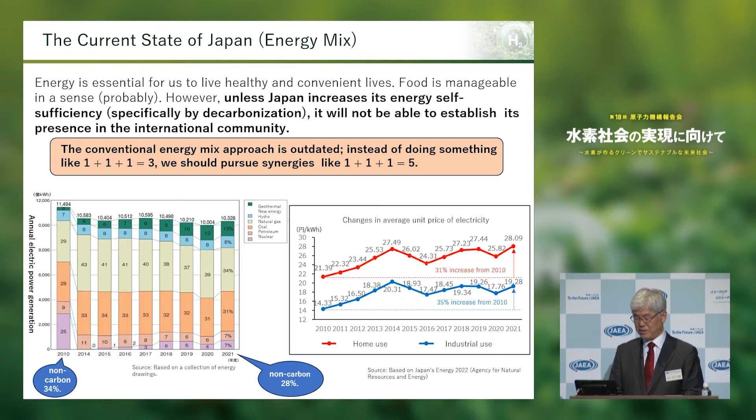As I mentioned earlier, Japan depends on foreign countries for its energy sources, and electricity prices are also going right up. Under such circumstances, the GX policy is being presented by the government. How should we understand this GX policy in the eyes of JAEA?

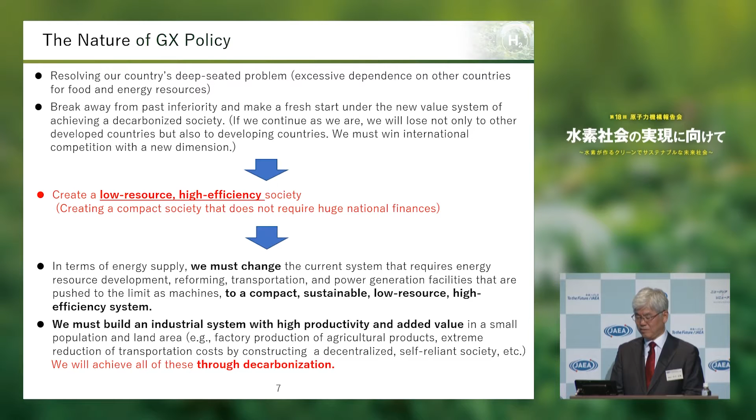Our policy is to create a low-resource but efficient society. Currently, we are rather high-resource dependent and low efficiency, yet we are sanctioned to turn this around. This is the way to clarify and strengthen Japan's position in the world. This is how I understand the GX policy.

Under these circumstances, electricity rates in Japan are becoming higher, as I just showed you in the chart. And why is it so expensive? Generally speaking, it is due to the soaring prices of energy such as oil, gas, and coal. It is said that it is due to international competition and the weaker yen. But is this really true?

On the other hand, I still see another problem, particularly the low utilization rate of power facilities. Renewable energy basically has a low utilization rate subject to natural conditions. On the other hand, coal and gas power generation, used as backup power sources, may have been affected by this problem and is in a state of low utilization.

There are many nuclear plants that have been shut down or whose decommissioning is already decided, and only a few are in operation. Unfortunately, coal-fired thermal power plants have been restricted to a low operation rate due to CO2 emission restrictions. In other words, in total, the low utilization rate of each sector of power generation leads to high energy costs. This is borne by the people and the industry.

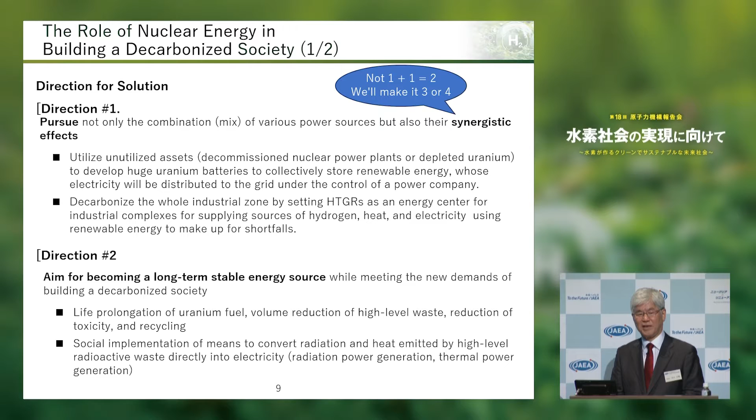The second direction is to aim for securing a long-term stable energy source while meeting the new demands of building a decarbonized society, or convert the radiation or heat that comes out of it directly into energy. Through this kind of research and development, we believe this could be a direction for a solution. Furthermore, we do not yet fully understand the characteristics of nuclear power, so our current focus is on power generation. Can we utilize nuclear energy in various industrial fields such as medicine, materials, agriculture, etc.? Can we achieve this with high efficiency and lower resources?

These major directions can be summarized as follows. First, pursuit of synergistic effects of different energy sources. Second, being sustainable in the sense that it can be used as a long-term, stable energy source. Third, ubiquitous in the sense that it can be used in a variety of fields. This is one of the major targets JAEA should work on going forward.

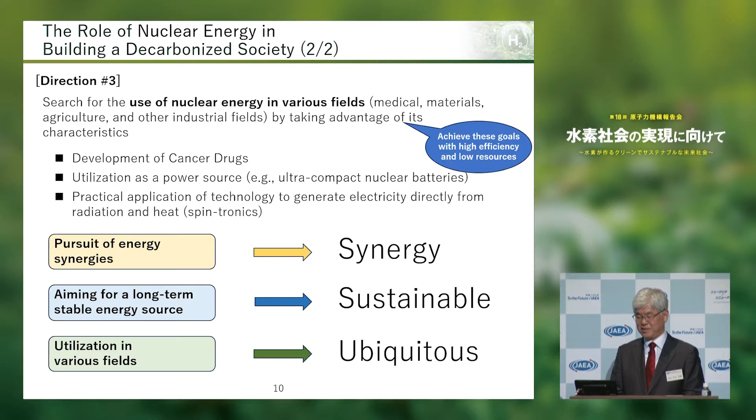Let me further elaborate. For example, regarding synergies, one of the major concerns of the public about nuclear power, on top of the pursuit of safety and efficiency of the nuclear reactor itself, is R&D in making nuclear power more sustainable, aimed at optimizing Japan's energy generation and coordinating with renewable energy. Research and development that reassure the public by solving back-end problems and demonstrating the safety of nuclear power in general.

Ubiquitous diversification of nuclear energy refers to research and development aimed at maximizing the potential of nuclear energy and promoting its application in a variety of fields. This is the schematic of what I have described. Synergy, sustainability, and ubiquity are well combined, and we would like to work on research and development in these areas.

For example, the development of high-temperature gas-cooled reactors, which we are presenting to you today, involves both synergy and ubiquity. This is a combination of using HTGR to successfully combine hydrogen with renewable energy to improve efficiency, and to utilize the various effects produced by HTGR in other areas as well.

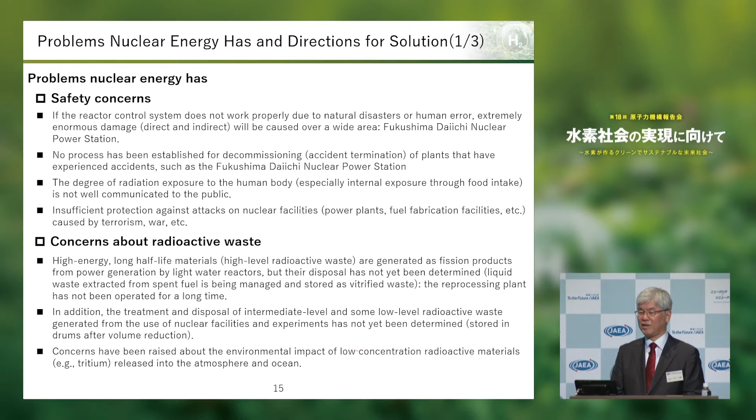Under these circumstances, JAEA would like to promote research and development in a direction that solves these problems. As for the safety of nuclear facilities, we will promote research and development on new reactors with high safety features, and improve accident resistance of existing facilities.

Accumulating this knowledge and working towards safe and efficient decommissioning, in particular identifying decommissioning pathways of the Fukushima Daiichi accident plant, is a major issue. To this end, we are actively working mainly in the Fukushima division.

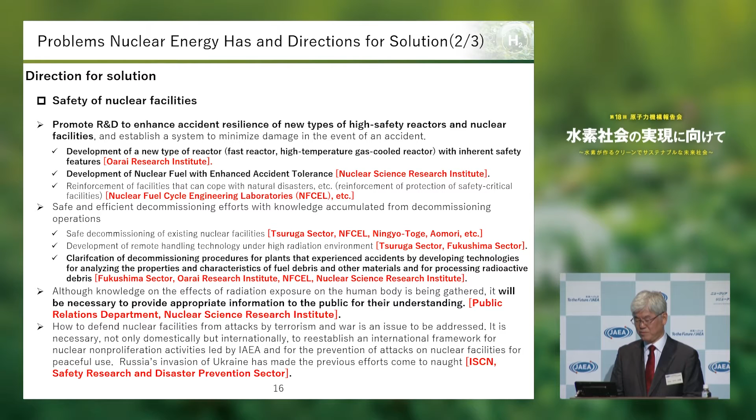We would like to also provide appropriate information on the effects of radiation exposure on the human body. However, with regard to the major issue of terrorist attack and war, although JAEA participates in international nuclear non-proliferation and nuclear security groups, we honestly believe this is a very difficult area for JAEA to deal with.

Then there is a question of what to do with radioactive waste. This is known as nuclear waste, but we'd like to promote this kind of research to see if we can somehow turn it into nuclear resources.

This involves extracting rare metals from this waste and recycling and utilizing them later, or using neutrons to change it into a substance with a shorter half-life. This is the kind of research we are conducting.

Through this kind of research and development, we will deepen public understanding of nuclear energy, reduce social and technological risks, so that nuclear energy can be used as a predominantly stable energy resource in our country. We'd like to promote research and development in this direction.

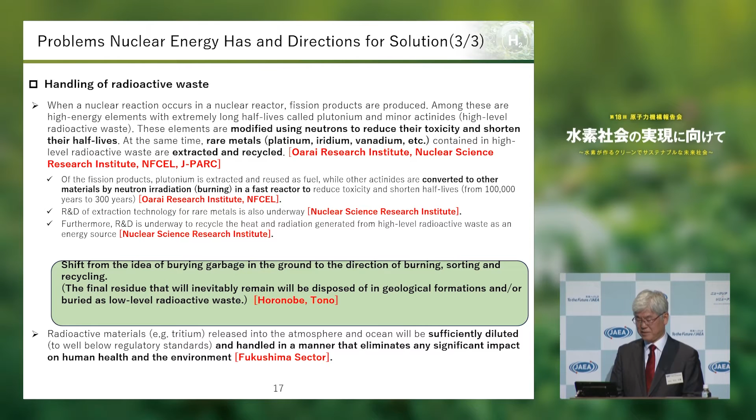In summary, Professor Claudia Goldin of Harvard University, the laureate of this year's Nobel Prize in Economics, said something interesting.

I read her book over 20 years ago. She examined technologies such as the radio, the automobile, and the computer that revolutionized society, and her analysis says that all of them took more than 70 years from their first invention to their practical application and broad penetration.

And in such a process, there are always negative aspects as well as positive aspects. They all solved the problem and advanced to higher penetration.

The spread of automobiles, for example, is naturally convenient, but as it becomes more widespread, there are problems of exhaust gas and traffic accidents. By solving these technical problems, and also by solving the problem of carbon dioxide emissions through the use of electric vehicles and a variety of technologies, all of these are very important for the wide use of vehicles.

The same applies to nuclear power. There are many ways to define what makes nuclear power practical. If the atomic bomb, which is very unfortunate, is considered put into practical use, it was about 70 years since then.

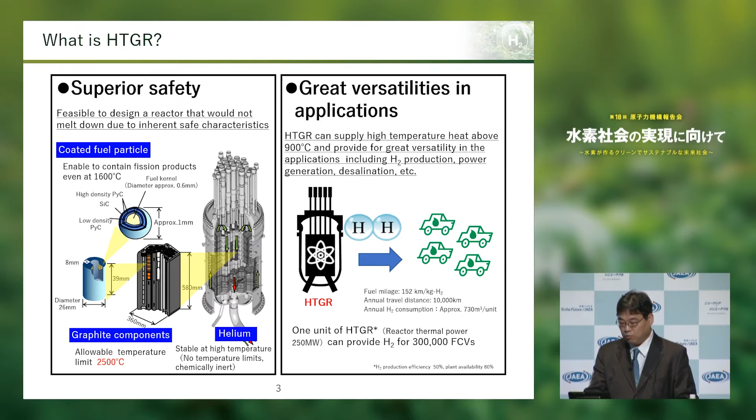We will discuss these two advantages in more detail. The first is superior safety, derived from three key factors. First is ceramic-coated fuel: we use fuel particles coated multiple times by ceramics. These fuel particles start to break down only when the temperature exceeds 2,000 degrees Celsius, so in any case the fuel will not break down unless the temperature exceeds 2,000 degrees Celsius.

Next is graphite structural materials. Graphite has a high heat capacity for HTGRs, which suppresses output density. It is also an excellent heat conductor and thus has excellent heat dissipation performance. Therefore, even if heat is generated in an accident, the reactor has an excellent ability to store a certain amount of heat.

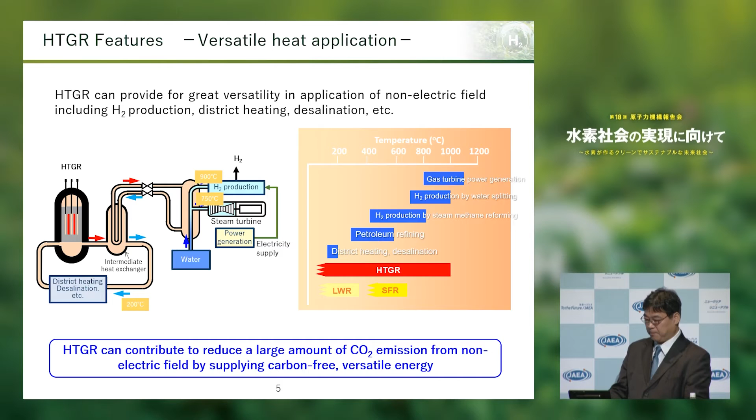In Japan, we have the HTTR in Oarai-machi, Ibaraki Prefecture, which is used for testing and research. This HTTR is our country's first HTGR and is currently owned only by China and Japan in the world. China adopted the pebble bed module. Japan is the only country using the pin-in-block type reactor. Nuclear reactor thermal output is 30,000 kilowatts and helium gas is used as coolant. The core structural material is graphite.

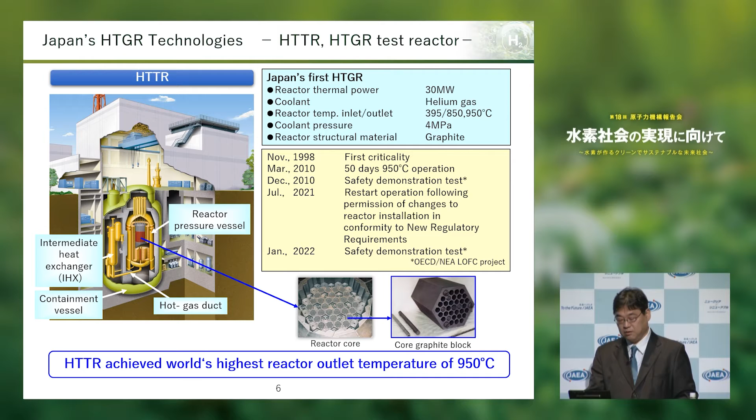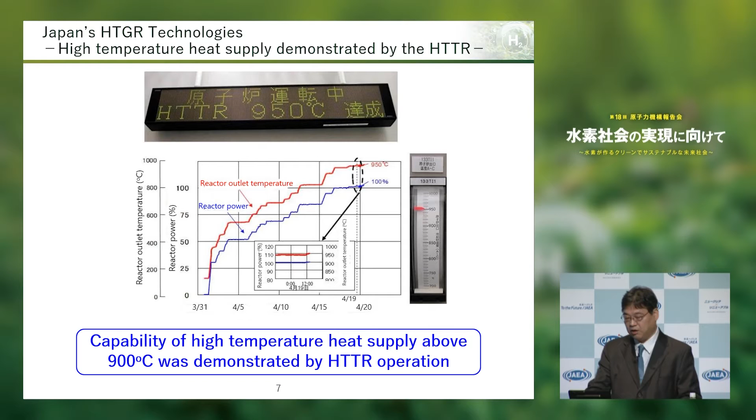Thus, HTGR itself can be built using Japan's technologies alone. HTTR was designed and built by all major Japanese heavy industries, including Toshiba, IHI, Hitachi, Fuji Electric, and Kawasaki Heavy Industries, with Mitsubishi Heavy Industries as the lead manager.

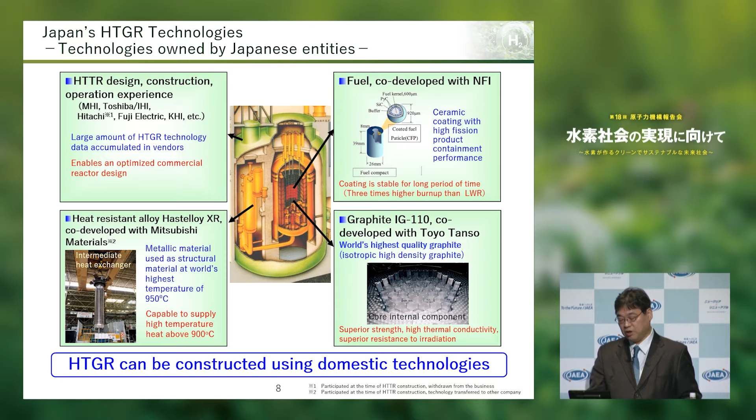As for the high-temperature materials, Hastelloy XR was developed jointly by Mitsubishi Materials and JAERI at that time. In the area of fuel, the world's best performing fuel is owned by NFI, Nuclear Fuel Industries. In addition, Toyo Tanso has the capacity to produce nuclear-grade graphite, IG-110, which is a structural material for the reactor core. This graphite made by Toyo Tanso is also used in HTGR in China. In this way, it is possible to construct HTGR demonstration reactors using only domestic technologies alone.

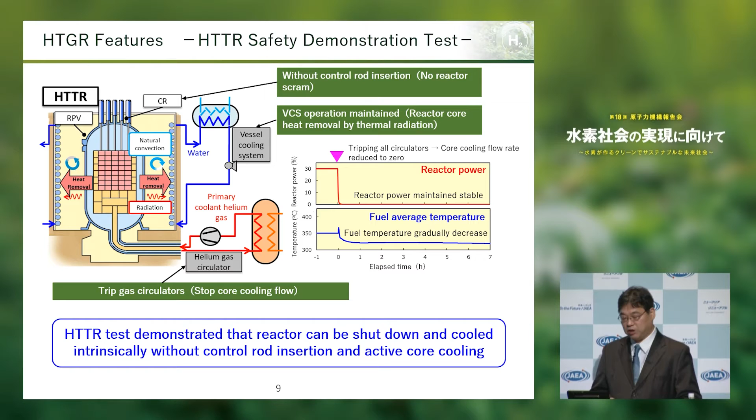This is what is called the inherent safety of HTGR. If you build too large a reactor, these phenomena will not occur. Therefore, in order to take advantage of the safety features of HTGR, reactors have to be small, and the output is inevitably limited. But this is a trade-off—at a certain size, HTGR has its inherent safety characteristics.

As for the issues and measures to be taken for the future social implementation of the HTGR, as explained earlier by our president, we believe the issues can be broadly divided into social, technical, and policy. I will omit the policy part from today's presentation, but I believe it will take time for the regulations to be implemented. The first is society, which requires site selection and development of a business scheme.

Specifically, we are planning to build a business model that can win social acceptance. We are currently planning a project to reach out to stakeholders and, as explained on the next slide, to take advantage of the UK government's project.

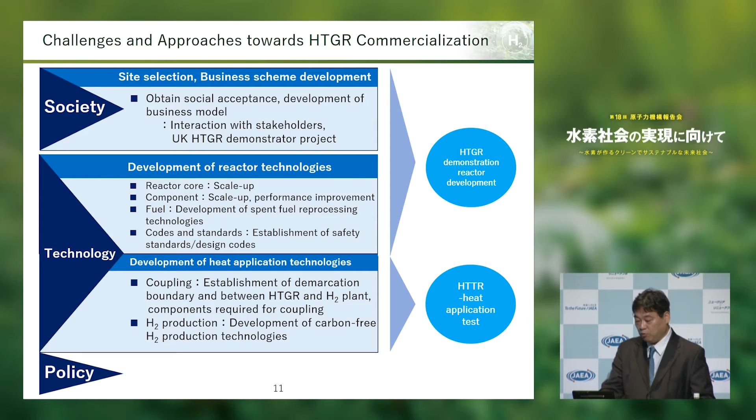This eventually has to be carbon-free technology, and we are currently discussing what is the best technology for this purpose. We need to solve these challenges through the development of domestic demonstration reactors, the HTTR, and heat application tests.

We would like to connect the hydrogen plant and steam reformer first. As a next step, we would like to consider carbon-free methods. That is what we are thinking at this moment.

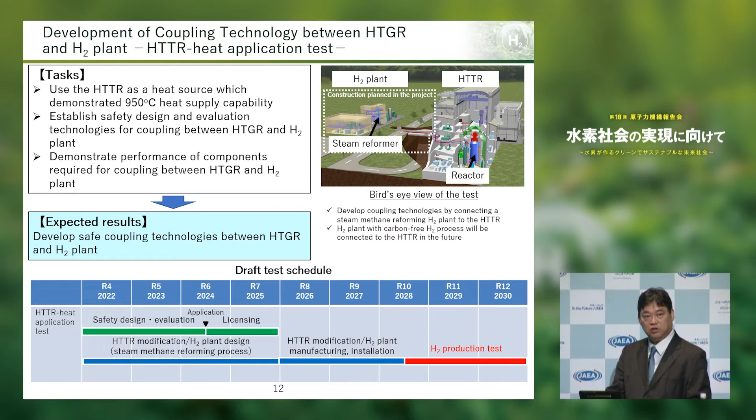By achieving this as soon as possible, we'd like to further establish this technology ahead of the rest of the world, and introduce it in the British project, which I will elaborate on later.

There are several applicable hydrogen production technologies. There are four at the bottom. Further left is methane reforming, which gives off carbon dioxide. The three on the right are green hydrogen, which does not emit carbon dioxide.

The three on the right, from left to right, are: high-temperature steam electrolysis, SOEC, which is partly commercialized; then in the middle, methane pyrolysis, where methane is differentiated and extracted as solid carbon and hydrogen; and the rightmost is the IS method, a thermochemical method to make hydrogen using circulation of iodine, sulfur, water, and oxygen. We are developing these technologies.

We consider these three candidates, and we will assess the maturity level of technology to evaluate what will be most appropriate for the early achievement of HTGR. We are currently conducting a feasibility study.

It is not just about potential; we need to think about social implementation and the earliest commercialization. From this perspective, the current SOEC may have a reasonable advantage.

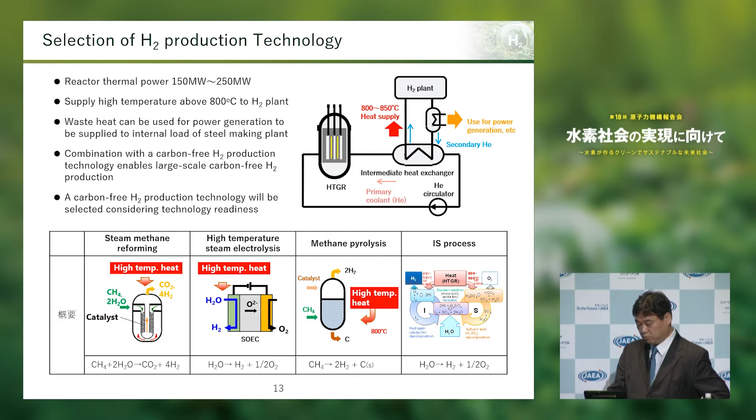Next is the social implementation model of HTGR. In the field of social implementation, we can build, for example, an HTGR in an industrial complex, or an HTGR in an energy supply center, and by flowing helium gas, heat can be used from various aspects and further utilized for hydrogen, electricity, and steam.

We'd like to supply these byproducts to oil refineries, petrochemical plants, chemical plants, and steel mills. Also, hydrogen, electricity, and steam have capacity to adjust power, so we would like to use them for curtailment of renewable energy, as Dr. Kato mentioned earlier in his presentation. For example, HTGR can be used to produce hydrogen during the day and produce electricity at night. Also, it can serve external demand, with hydrogen, electricity, and steam used to meet demand flexibly in the neighborhood.

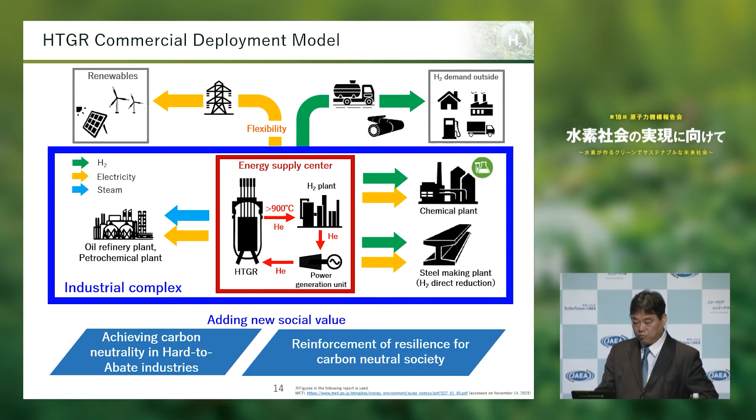However, HTGR's greatest strength is in the utilization of heat. So we are thinking about how we can create and use hydrogen and steam in the industrial complex without losses. In other words, we can provide new social value. I believe that HTGR can be used to achieve carbon neutrality in industry and to strengthen the resilience of carbon-neutral society and its systems.

From here on, I'd like to touch upon the United Kingdom, who is also trying to utilize HTGR from a similar perspective as Japan. The UK decided to specialize in HTGR as the next generation reactor. Power generation will be done by SMR, which in the UK is a light water reactor, but HTGR will be used for the parts that use heat, especially for plants that are difficult to decarbonize. With this in mind, the UK is proceeding with the HTGR demonstration program, comprised of Phase A, B, and C. Phase A is a pre-FEED study which has already been completed. Phase B and Phase C follow, and Phase B is currently underway.

For Phase A, 4 institutions applied. Phase B is now underway with 2 shortlisted institutions. NNL, a British National Research Institute, and JAEA have teamed up to apply for Phase B, which has been adopted. The other institution is an American company. In order to promote this program, especially for decarbonization in the UK, a comprehensive memorandum of understanding on HTGRs was recently signed between NNL of UK and the JAEA President in September.

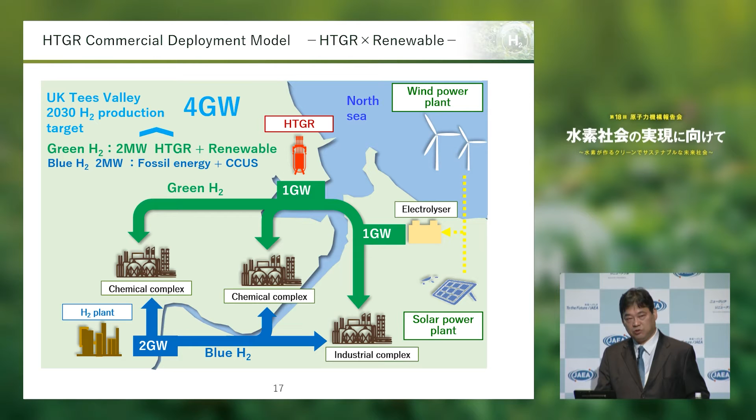So in the future, we will probably build a demonstration reactor here in the UK, using this site as the first candidate. This is the plan that is underway. JAEA is cooperating on this project. The HTGR itself will be built with Japanese technology. The UK operates carbon dioxide cooled reactors, but almost no HTGR. We are in the process of introducing our technology, and we would like to eventually bring such technologies back to Japan.

Furthermore, the residents living near the Hartlepool, Tees Valley site are quite aware of the benefits of nuclear power plants, and I have heard that surveys show 70 to 80% of residents are in favor of nuclear power plants. I believe achieving this location near the place of demand users will be a major step in the future development of HTGR.

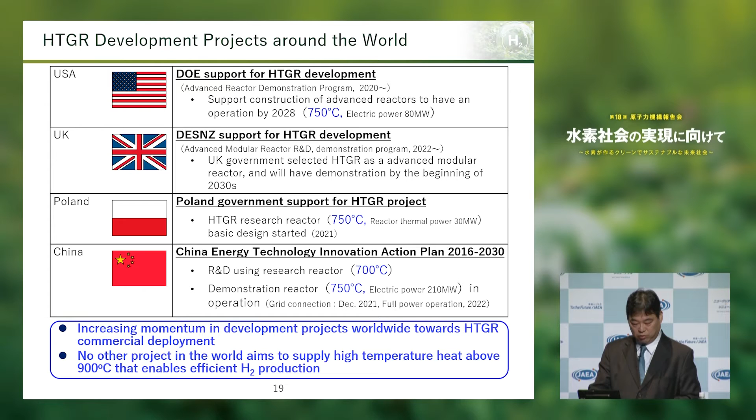In closing, let me summarize. In terms of hydrogen production in Japan, there are several issues. We are looking into the location of HTGR with excellent safety features in close proximity to users' premises in Japan as well. The UK already started the planning, and we are hoping to achieve this in Japan through dialogue with the regulatory side and try to realize it in the demonstration reactor.

Second, this is the development of the demonstration reactor, which also aims to start operation in the second half of the 2030s, while also being able to supply the necessary amount to become carbon neutral by 2050. I would like to work with a great sense of speed, and I'd like to work with industry to achieve our country's goal of zero carbon emissions by 2050 with all of our efforts at JAEA.

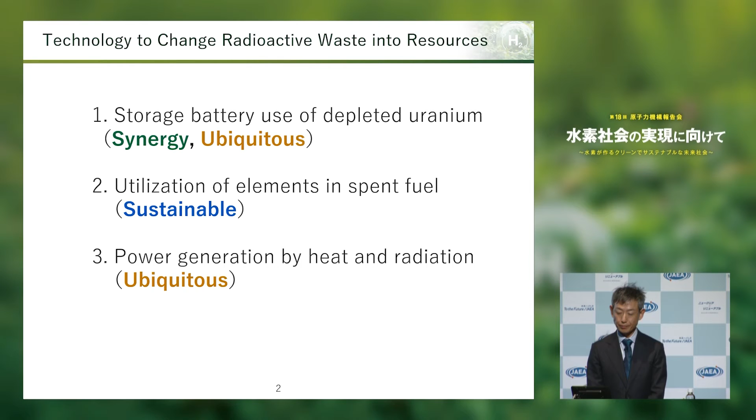Let's talk about the first technology. I would like to share with you this number, 16,000 tons. Will you be able to tell what this number represents? It is the amount of depleted uranium stored in Japan.

As participants here today probably understand very well, new fuels used in nuclear power plants are called enriched uranium. Highly fissile uranium-235 inside natural uranium is collected and enriched to be used for power generation. What remains after uranium-235 is removed, mainly composed of uranium-238, is called depleted uranium.

The depleted uranium is currently stored to be used for fast reactors in the future. As of 2021, around 16,000 tons of depleted uranium is stored.

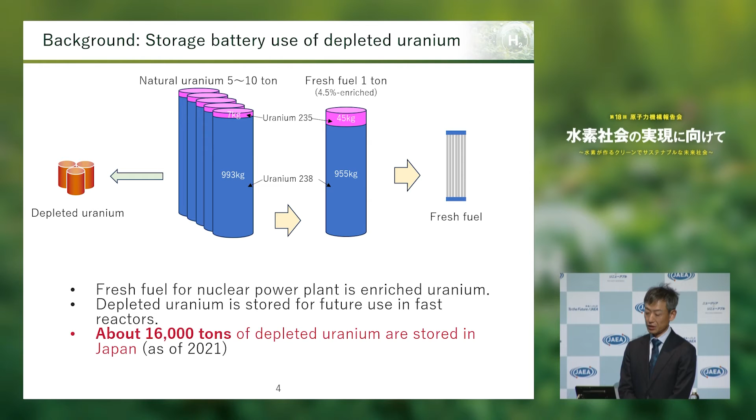Against that backdrop, we are currently working on research and development, thinking of the possibility of using depleted uranium as a storage battery. In other words, we are thinking of storing surplus electricity from nuclear power plants and renewable energy inside this storage battery, making a contribution to peak shift and grid stabilization, and sending the power to the point of consumption.

Furthermore, we are thinking of using this as an emergency power source at nuclear power plants as well. So our idea is to develop a uranium-based redox flow battery to use non-burnable uranium as a resource to store surplus electricity generated by renewable energy and nuclear power plants.

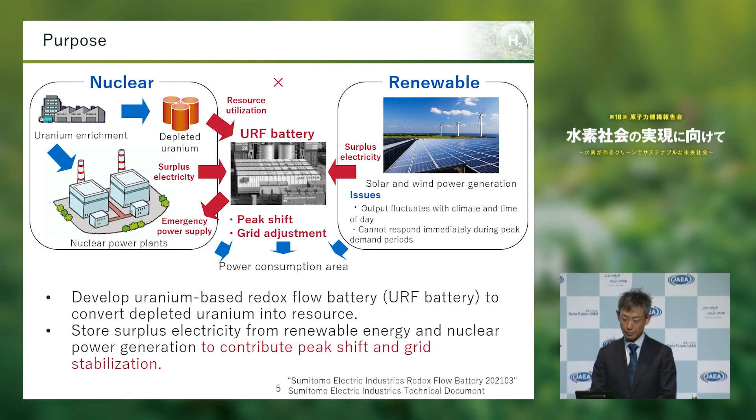Let me explain the uranium redox flow battery. As shown in the diagram, there are two types of tanks, and uranium solution circulates in the tanks. As for the uranium, there are 4 different uranium valences as shown. In this system, that difference is used to charge and discharge at the cell.

What are the features of the uranium redox flow battery? One feature is its large capacity. Basically, in this concept, you can increase the amount of storage by increasing the capacity of the tank.

According to one estimate, 30,000 kilowatt-hours, equivalent to electricity used in one day by 3,000 households, can be stored by using 650 tons of uranium. If we convert 16,000 tons of depleted uranium, in other words all the depleted uranium in Japan, into storage battery, it is estimated that it would be equivalent to 740,000 kilowatt-hours. That is 25 times the number shown here, meaning we can store electricity worth 75,000 households.

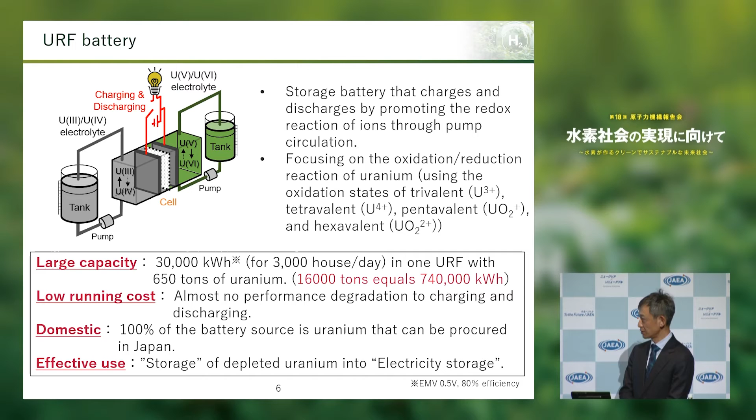Now, I suppose many people wonder why we should use uranium. Here, I listed advantages and disadvantages of using uranium. The redox flow battery itself is a practically used technology, structured of vanadium, though we are fully dependent on import for the vanadium element.

To address this point, we believe depleted uranium can perhaps be used to make a semi-domestic battery. Another point is that it is more efficient than vanadium.

Let me share an example. Electricity loss occurs all the time when we recharge. That loss is around 20% in case of vanadium, but loss is only 3% for uranium according to a report, making it efficient.

On the other hand, one known disadvantage is instability of uranium valence when it is contaminated with water, though it has already been confirmed that it can be stabilized by electrolyte preparation. Furthermore, handling of uranium as nuclear fuel material can be a challenge. I would not say it can be installed in a variety of locations, but, for example, we think it can possibly be used in the way shown on the slide and be installed in nuclear power plant sites.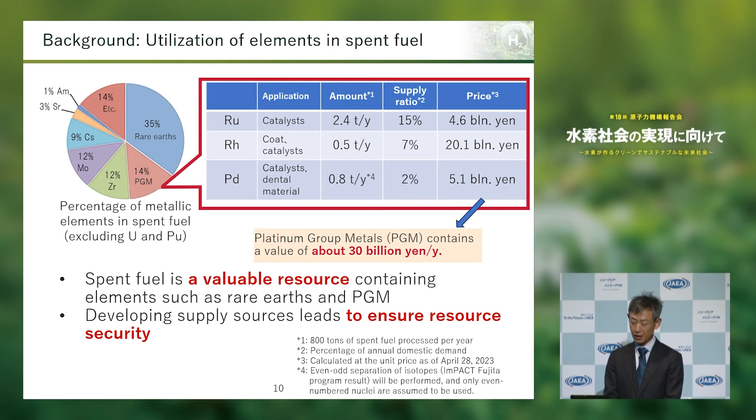Therefore, JAEA has been working on developing element separation technologies. By advancing the technology, utilizing existing facilities, and applying it to spent fuel, high-level liquid waste, and industrial waste known as urban mines, we look forward to developing practical separation and utilization technologies for useful elements.

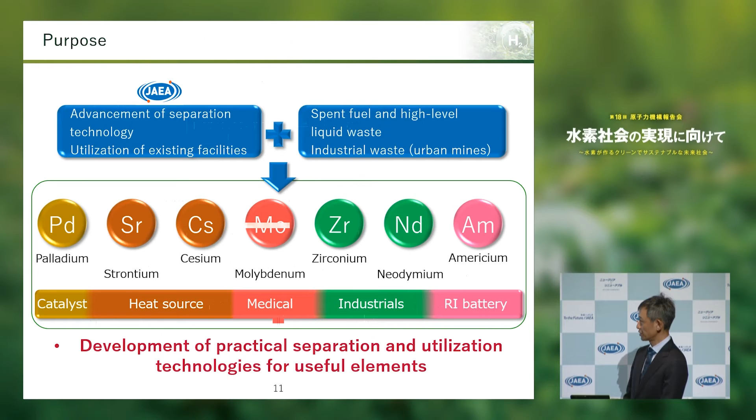Let's look at the actual ways of separation. Allow me to introduce one of the ways called solvent extraction. As for the method, JAEA has already been developing the SELECT process, shown in the slide.

The process has been under development mainly for separating minor actinides called americium and curium. By using that process as a base, we are trying to develop a technology to separate elements such as palladium and rare earth, which I have mentioned. We think this initiative is effective in reducing the volume and hazard level of radioactive waste by combining it with nuclear transmutation.

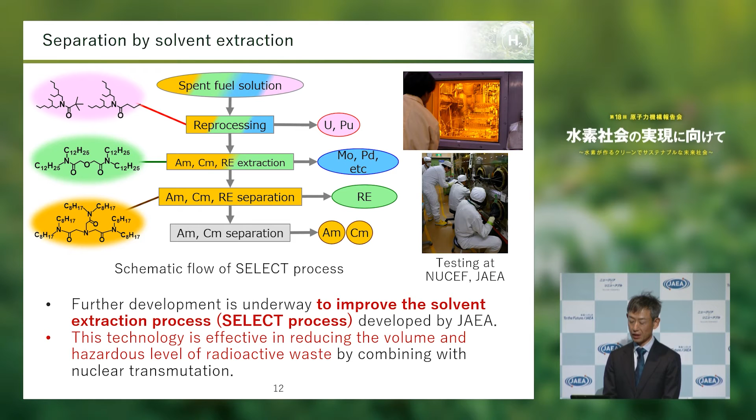Let me introduce you to another method called laser-assisted separation. We want to separate minor actinides called americium and curium from rare earth. But the minor actinide and the rare earth have chemical similarity, which makes it very challenging to separate them.

Though here, for example, by applying laser at absorption wavelength against americium, we can cause laser-induced photochemical reaction with americium. We are currently developing a technology to selectively separate americium only, by letting it either bind or not bind with liquid called extraction solvent. This technology has high element selectivity, so it is expected to simplify the process and reduce secondary waste. A press release was already made on it by JAEA last year.

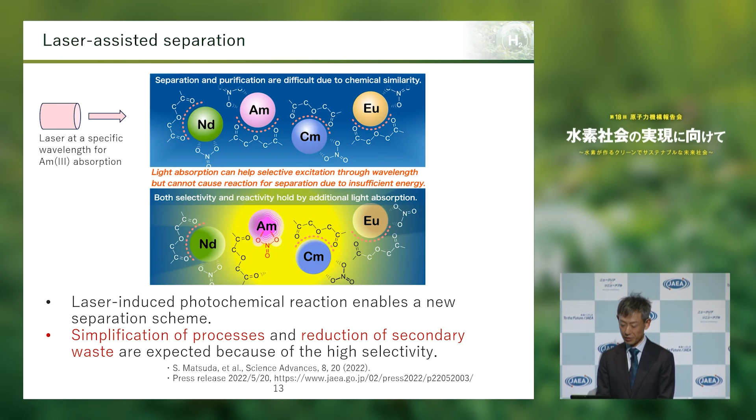Here is the current status and future prospects. Research on separating useful elements from spent fuel has already been conducted, but it is still in the basic research stage and has not yet reached the stage of practical application. In the ImPACT program conducted between 2014 and 2018, similar research was conducted. It was confirmed that 95% of a PGM, palladium, can be recovered by a method called wet electrolysis, though that is also in the basic research stage.

On the other hand, our idea is to realize advancement of the separation process to extract valuable elements from waste solutions, even if only in a small amount. Furthermore, as I mentioned, we are thinking of the possibility to apply such technology not only for radioactive waste but also for urban mines. So by extracting useful elements, we hope to extract several dozen grams of such elements from fuel solution in about 3 years and scale the technology.

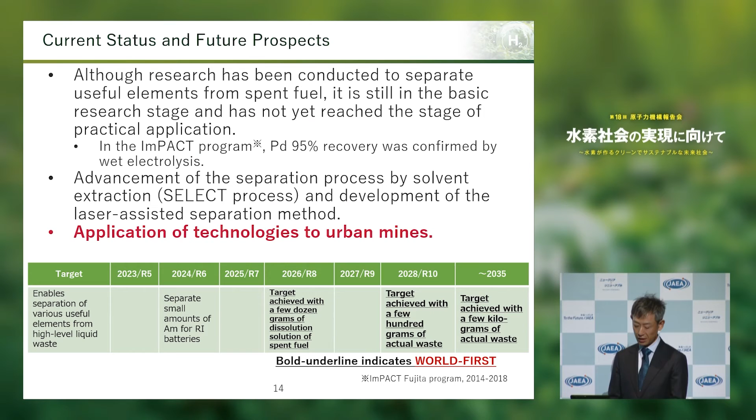So, why is plutonium-238 used? As I said before, elements used to convert heat to electricity are sensitive to radiation. On the other hand, plutonium-238 has high heat generation but low radiation. So this element is often used for space exploration, especially by the US.

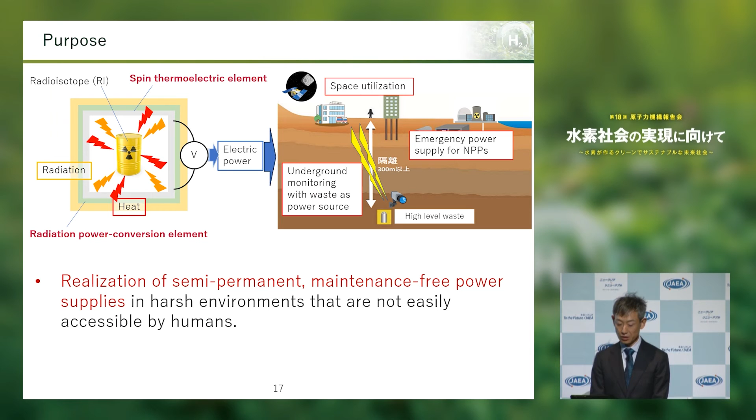As for conversion of heat into electricity, we are paying attention to a technology called spintronics. This is a hybrid technology of electric and magnetics. I am sure everyone knows that electrons circulate around the nucleus, and the charge of the electrons makes them move, which causes current, the main player in electronics.

On the other hand, the electrons are rotating as well, which is called spin current. The spin current is the origin of the magnetic current. Spintronics is a technology that tries to control and utilize the spin current.

We are thinking of using spintronics to convert heat to electricity. Existing thermoelectric element systems and spin thermoelectric elements are compared on this page.

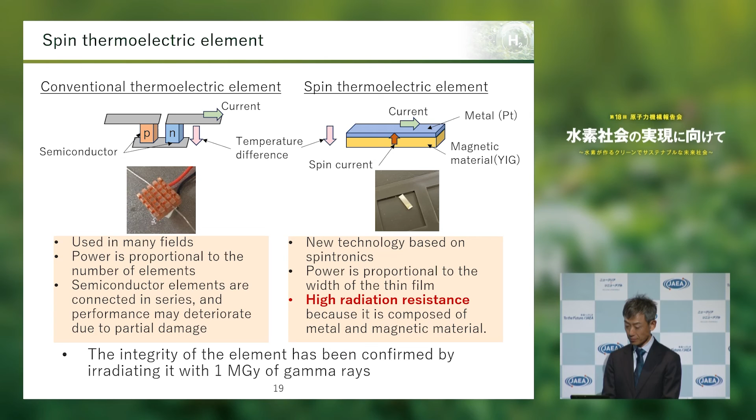We have already demonstrated its principle by applying Harima's SPring-8 synchrotron X-rays to an element made of Ni and SiC. The synchrotron X-ray is used as an alternative to gamma ray.

Let's look at current status and future prospects. Proof of principle for both spin thermoelectricity and radiation power generation that I talked about are confirmed, though the issue is their low power generation efficiency. So it is required to improve power generation efficiency and to conduct demonstration tests using radioactive waste.

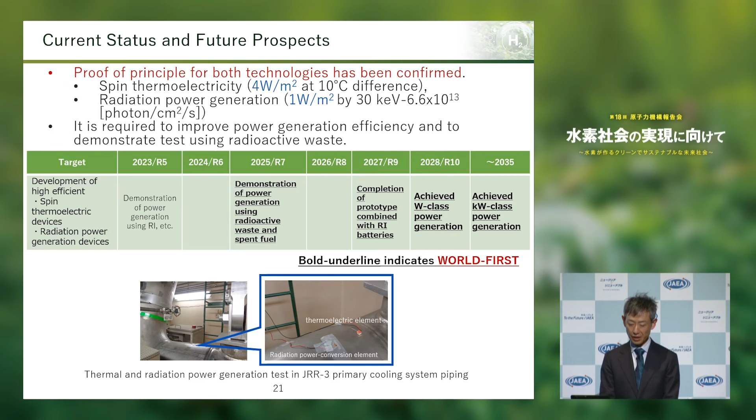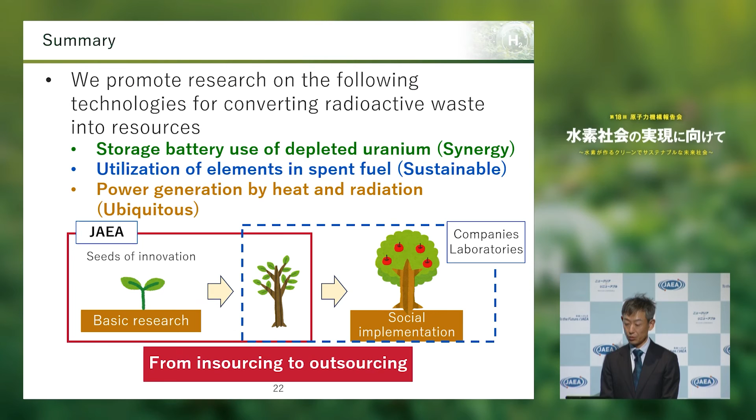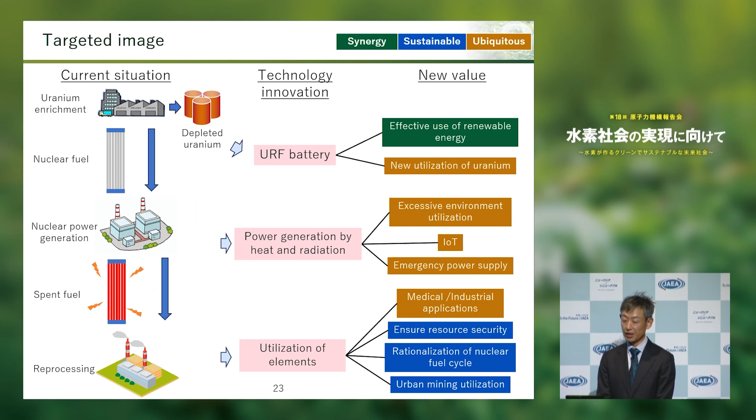With this, I would like to conclude my presentation. Thank you for your attention.

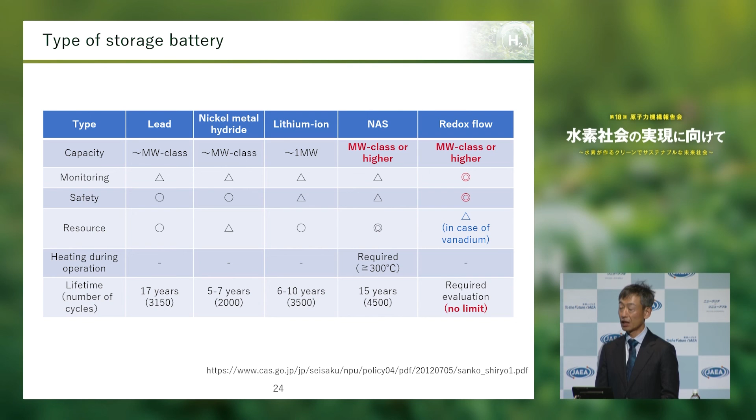If we could replace the material with uranium, then, from the standpoint of securing resources, it can be an attractive storage battery. Thank you for the question.

Are there anyone inside the venue with any questions? If not, let me share another question on high-temperature gas-cooled reactor from an online audience.

I think the high-temperature gas-cooled reactor is fit for direct disposal of spent fuel. But is development of reprocessing technologies necessary?

Back end of fuel is being done in accordance with policies, which means we will work on reprocessing technologies as well.

As I already mentioned, establishment of pre-processing technologies is necessary to be part of light water reactor cycle. We have done that with fresh fuel once, but we still have not done that with spent fuel. Development of the technology is a homework for the future.

In other countries, direct disposal is considered, but based on policies, we will reprocess in Japan.